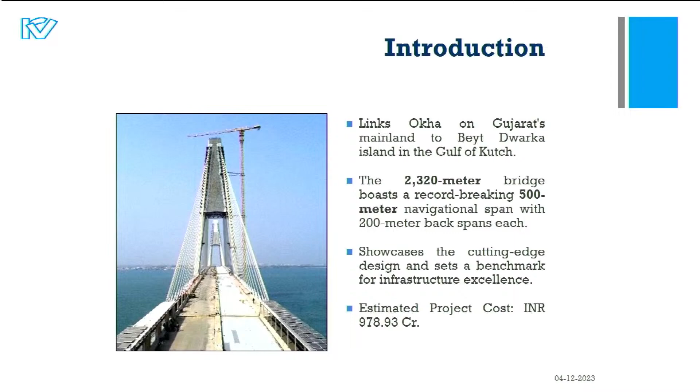So we are constructing around a 5-kilometer bridge linking Okha on the Gujarat mainland to Beyt Dwarka. The bridge proper length is around 2320 meters, and we have the highest record-breaking navigational span of 500 meters in this bridge. The cost of this bridge is around 978 crore.

As you can see, this bridge connects the mainland to Beyt Dwarka Island, and this Bet Dwarka is the home of Lord Krishna. So Bet Dwarka is the Indian version of Atlantis - there used to be a city of gold in Bet Dwarka, which was immersed in the sea at the end of Dwapar Yuga. So the main bridge length is around 2.32 kilometers.

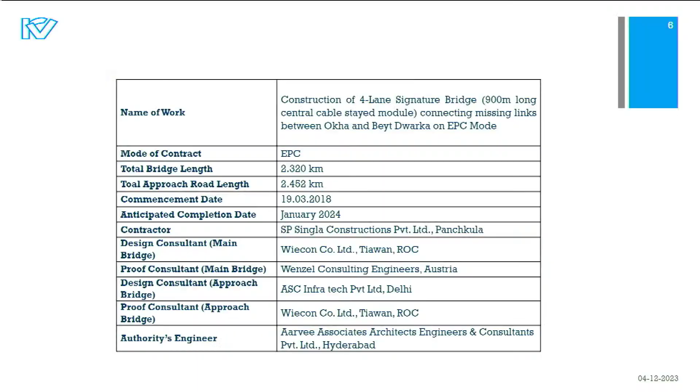This bridge also has an approach road of around 2.5 kilometers, distributed on the two sides. The commencement date of this project is March 2018. Bridge length is 2.32 kilometers, approach road length is 2.452 kilometers, and the bridge is going to be completed very shortly.

The contractor is Messrs. SP Singla Constructions. Design consultant is Wiecon Taiwan, proof consultant is Wenzel, design consultant is ASC Infra, and proof consultant is Wiecon. Authority engineer is Aarvee Associates.

The main bridge length, which is the cable-stayed portion, is 900 meters. Span configuration is 200 plus 500 plus 200. The deck width is around 29.6 meters. It's a 4-lane bridge, the carriageway width is 9.5 meters, and it is on pile foundation.

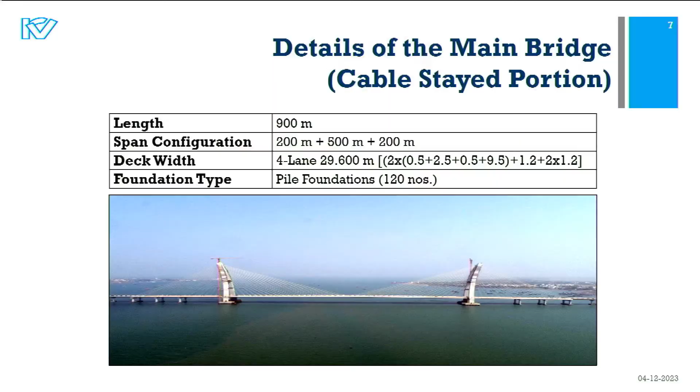In addition to the main bridge, there are approach bridges on both sides - 17 spans on the Okha side, 15 spans on the Beyt side. Deck width is 27.2 meters, and pile foundation is there. The approach road length is around 2.5 kilometers, 1.241 on one side and 1.2 on the other side, with two junctions, one on the Okha side and another on the Bet side.

We are providing 3 parkings: one on Okha side, one on Bet side, and one near the temple, which is called the VVIP parking. There is a pedestrian walkway throughout the bridge, around 2.5 kilometer pedestrian walkway is there. There is decorative lighting, and because the theme of this project is Lord Krishna, there is peacock feather engraving on the pylons.

This is one of a kind bridge in the world. It has an iconic A-shaped pylon, which is in curve shape, and this pylon is hollow from the inside. There is an outward inclination of around 21 meters from the center.

We have used epoxy coated steel in the bridge and M70 grade concrete. There are 38 cables on each pylon on both sides, so a total of 152 cables. The cables which are more than 80 meters are provided with dampeners. Each strand has been galvanized, enclosed in extruded polythene protective sheath, and bundles of strands are further encased in HDPE tube.

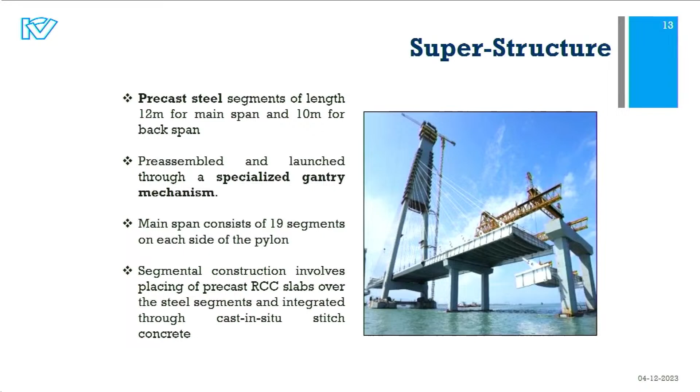The superstructure consists of precast steel segments, which are 12 meter size in the main span and 10 meter on the back span. They are pre-assembled and launched through a gantry mechanism. The main span has 19 segments on each side. It involves composite construction - RCC precast slabs are placed over steel segments, and then stitching is done.

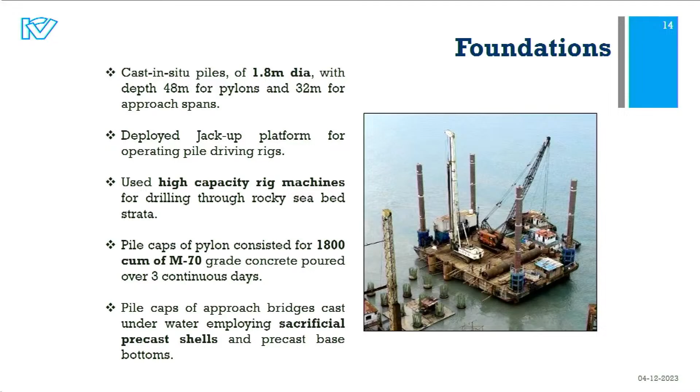The size of foundation for this bridge includes 1.8 diameter piles. For pylon, the depth of piles is 48 meters. For approach span, it is 32 meters. We have deployed jack-up platforms for pile driving, and used high-capacity rig machines as the strata is rocky seabed.

Pile caps - there are gigantic pile caps which involved 1800 cubic meter of concrete, and the concreting had to be done continuously for 3 days. Pile caps of the approach bridge are cast underwater. This is also a prominent feature of this bridge, and sacrificial precast shells were used for this.

The superstructure of the approach bridge consists of spine and wing arrangement. The spines have been launched using a spine launcher of 800 metric ton, which was positioned over the pier caps. Wings have been connected to spine using pre-stressing, and the substructure consists of circular piers of 2.6 meter diameter.

This project is going to have pedestrian walkways with solar roof, around 2.5 meter wide, and all along the pathway there are intricate carvings on the life of Lord Krishna and shlokas from Bhagavad Gita. The roof has solar panels which will generate around 1 MW of solar energy. The solar panels also have a sprinkler system, keeping in view the environment of that area.

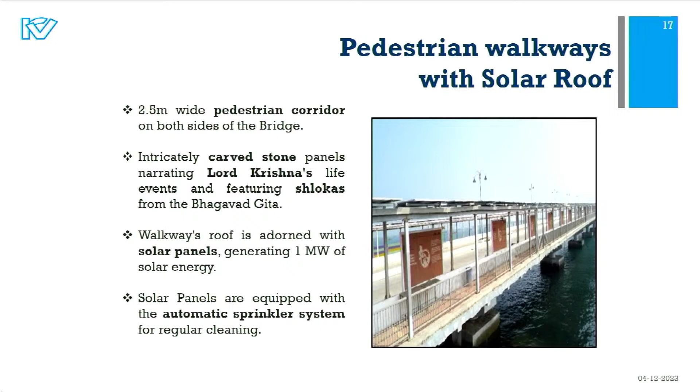There are 12 viewing galleries in this project, and peacock feather engravings and paintings are on the pylons. One special feature is the decorative lighting, which will be based on the theme of color of peacock feathers.

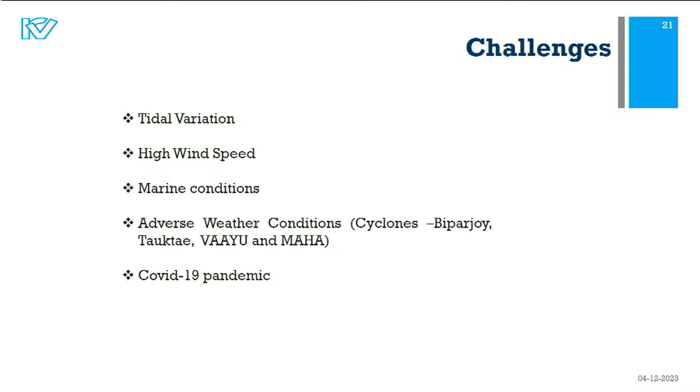This was a very challenging project because it is affected by tidal variation. The wind speed is very high in this region. The marine conditions cause a lot of problems, and there are a number of adverse weather conditions because this is on the sea coast. A lot of cyclones have affected this project - the most recent one was Biparjoy in 2023, in 2021 it was Tauktae, and in 2019 there were 2 cyclones, Vayu and Maha.

COVID-19 pandemic also affected this project.

This project is going to be launched very shortly, inaugurated very shortly. The progress is nearing 97%, and this will ensure seamless connectivity between Okha and Beyt Dwarka.

Earlier the people had to depend on ferries which ply between the mainland and Beyt Dwarka, but the ferry service is affected by weather. Once this bridge is commissioned, the life of the local residents will be transformed entirely.

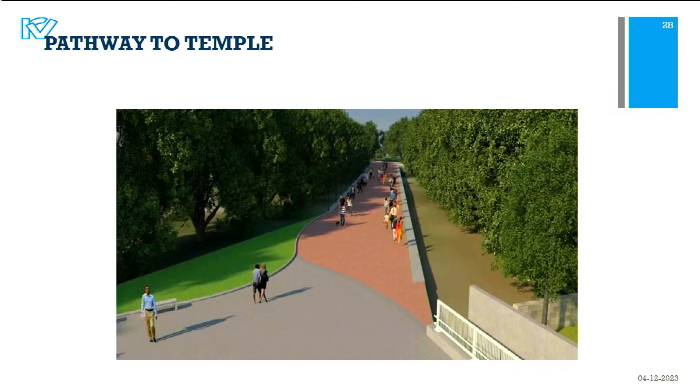This is how the bridge will look like. This is the view of the viewing gallery at the pylon location - on each pylon there are 2 viewing galleries. This is the pathway to the temple. This is how the peacock engraving will look like.

We also have a short video - this is a video of the actual bridge.

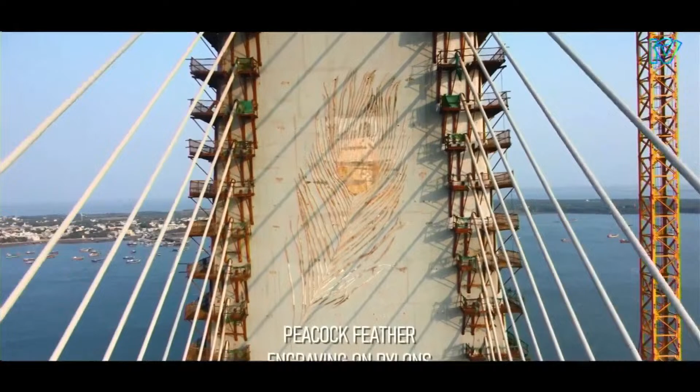To put things into perspective, around 1,50,000 cubic meters of concrete was used in this project, around 50,000 metric tons of rebars, around 10,000 metric tons of structural steel, and around 1,500 metric tons of stay cables.

So I welcome you all to visit this bridge once it is open to traffic in January. Thank you.

Thank you, Sandeep, for giving glimpses of the bridge under construction. Though the original schedule has been delayed because of challenges like tidal waves, construction inside the sea, and even COVID, there were a lot of issues. But finally it's going to be completed very soon. 97% progress is already there.

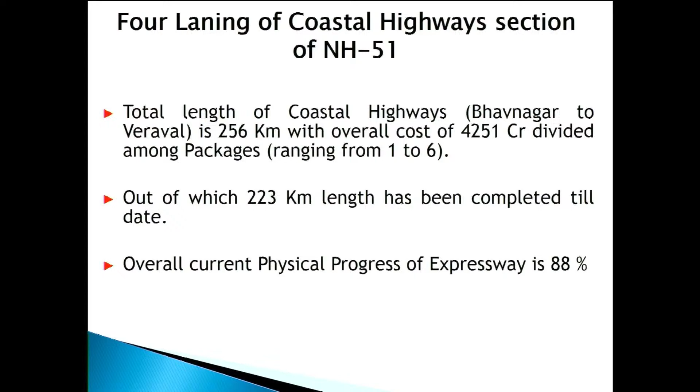Another section is Sanchor-Santhalpur Express Highway, which has 4 projects, 125 kilometers, and is about 94% complete. Another coastal highway has 6 packages, 256 kilometers, with financial implication of 4,000 crore, out of which we have completed 223 kilometers. Overall progress is about 88%. Soon it will be completed.

Other projects under implementation by NHAI are listed in the table. Now I go ahead. Status of upcoming projects - new projects we are going to take up, about 800 kilometers, having financial composition of 24,000 crore.

Now I will share with you some success stories of regional office Gujarat. We have built 2 world records, created in the state of Gujarat by MORTH, NHAI - construction of a 2.5 kilometer long, 4-lane cement concrete road in 24 hours.

Another is highest quantity of bituminous mix laid by road construction in 100 hours. This is in Panchmahal district. Some salient features are as below. These are the project details.

Concreting of highest PQC, highest quantity of pavement quality concrete laid in 25 hours. We had targeted 12,000 cubic meters and achieved 14,000 cubic meters. Largest quantum of pavement quality concrete production in 24 hours - this is also about 12,000 cubic meters targeted, and we achieved 14,000.

Laying 1,200 meters we had decided, but we have achieved 1,285 meters. Total area covered at 48,000 square meters.

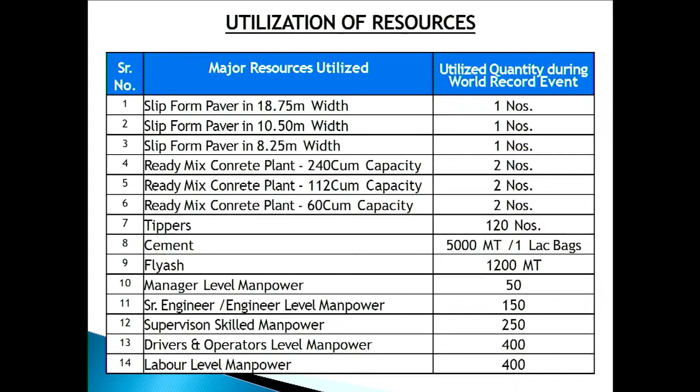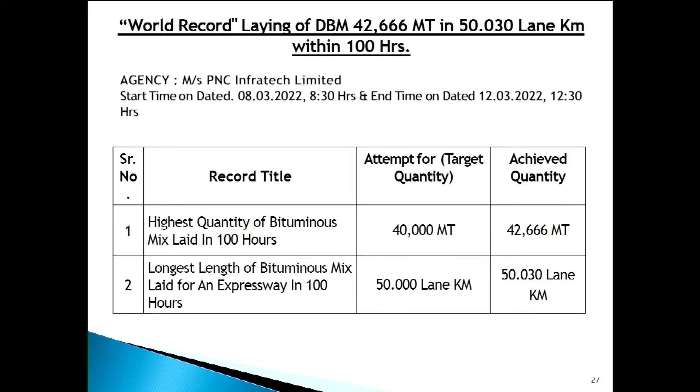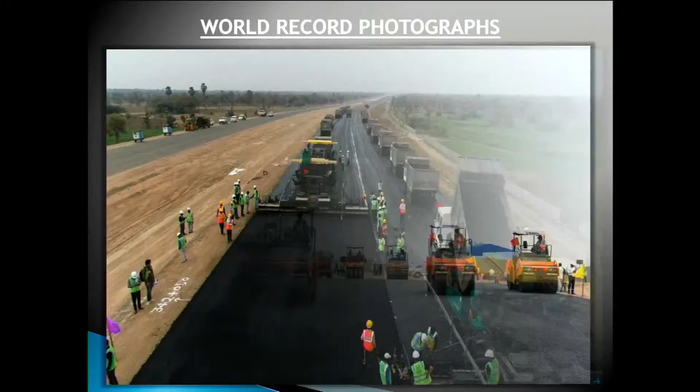These are the certifications given by the agencies: India Book of Records for the longest length of flexible pavement, DBM course road construction in 100 hours, and the highest quantity of bituminous mix laid for road construction in 100 hours.

In this Delhi-Mumbai Express Highway project, we have also utilized some new technologies. I will share some of them with you. These are precast boxes in 2 by 2 meter and 3 by 3 meter sizes.

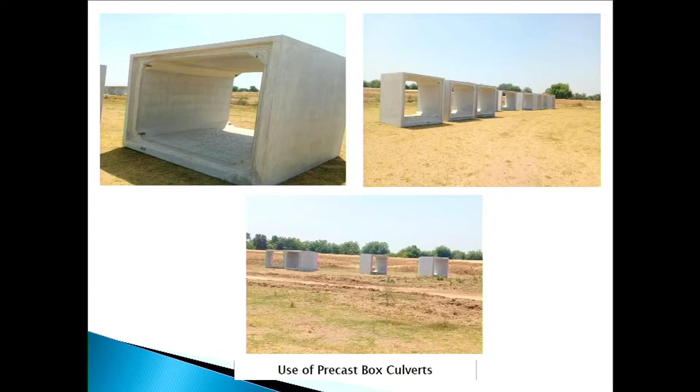There are 3 types of wayside amenities. Type 1 is for passenger facilities. Type 2 is for truckers and goods vehicles. Type 3 serves both passengers and truckers.

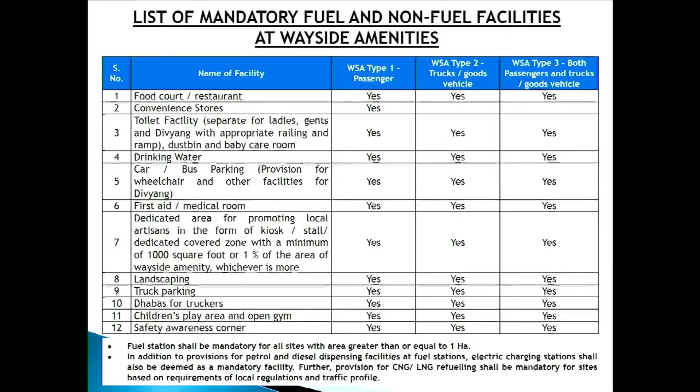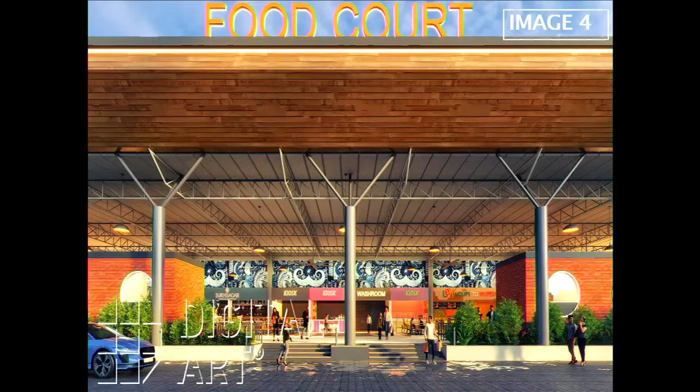Some photographs are there, and this is an animation. After complete construction, it will look like this.

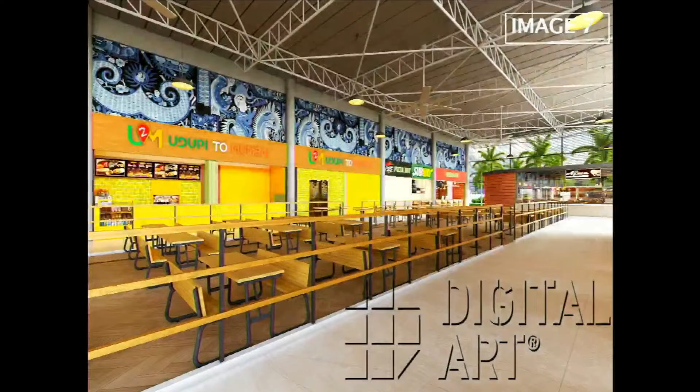There are dhabas, motels, food courts, and trauma centers also there. A fuel station is also there, along with dormitories for drivers.

Now I will show some slides and some videos.

पहला कौन सा दिखा रहा है? ये साइड का?

This is a small presentation, a small video showing the progress of the highways in Gujarat state.

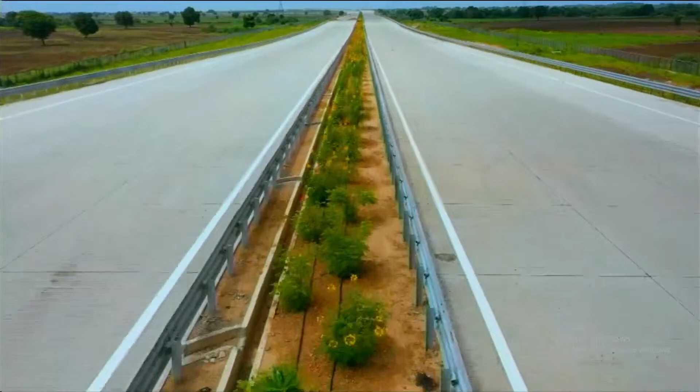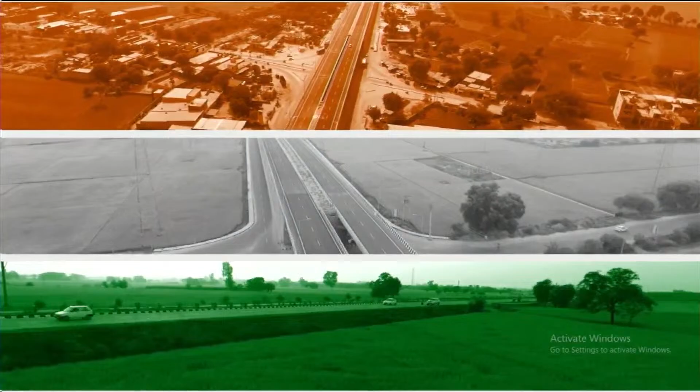जय हिंद। दिखा एक बार।

लास्ट वाला ना सर? वो करो। टाइम ज़रा कम है, पर एक मैं वेसाइड एमेनिटी का एक एनिमेशन भी दिखा देता हूँ आपको। शुरू हो गया।

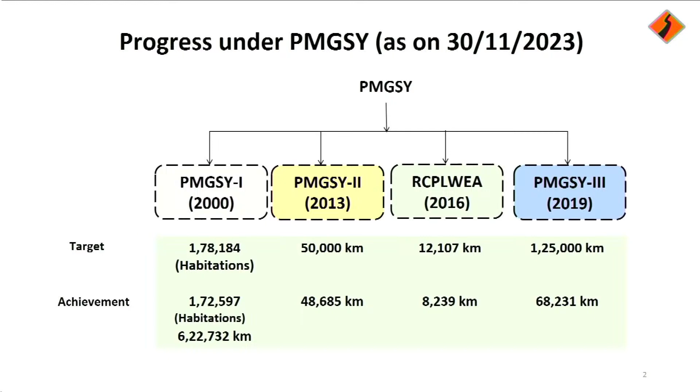Under this scheme also, almost 68,000 kilometers has already been completed. This is what we have achieved during the last couple of years. A quick presentation of what lengths we have completed during the last couple of years.

From this data, you will find that at one point of time, we were constructing roads with an average speed of almost 135 kilometers a day. Now, because we are almost at the fag end of the scheme, the completion rate has reduced, but still we are working at a speed of almost 45 kilometers per day. Along with this, we are also implementing new technologies, with which we are constructing roads at equal speed, almost half of the total completion. That is, if we are constructing 45 kilometers a day, almost 25 kilometers are being constructed with various new technologies. These are the financial releases and expenditure over the years.

Various new technologies are being adopted. In fact, we issued guidelines in 2013, and since then we have started implementation of various new technologies in different states based on need and availability of materials. These are the new technologies being practiced as of now, and till now, 1,43,761 kilometers of roads with various new technologies have been sanctioned, and 94,000 kilometers has already been completed.

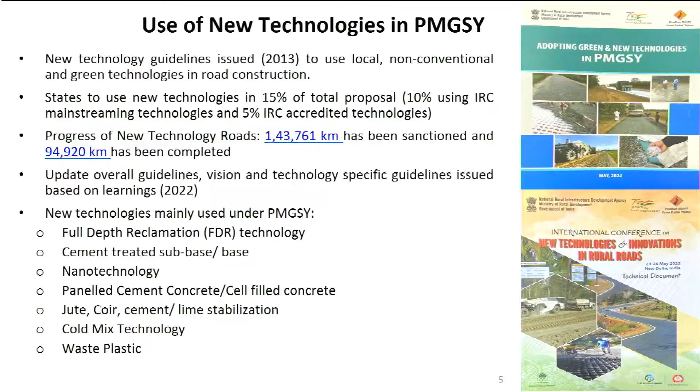To avoid that, we started publishing a lot of documents on our own for the time being, so that implementation starts immediately. These are in the form of do-it-yourself booklets. A few of them are being presented over here. This is the overall increasing sanctions under new technology, which have already been given to the states. These are the do-it-yourself booklets, which have already been published by NRIDA, so that some of them may cover subjects for which IRC guidelines have already been published.

But looking into implementation-related issues, because these roads are being constructed by Jila Parishads and rural engineering departments in different states, for ease of understanding, these booklets have been brought out like that on white topping. We already have an IRC guideline, SP-76, but further simplifying the language and technology, this guideline has been brought out so that people can go through it and start execution or adoption.

Then we have a very strong IT backbone for monitoring of the scheme and even for implementation of these new technologies. This is the website through which the entire PMGSY is being monitored. This is our data website being managed by Center for Development of Advanced Computing, that is CDAC Pune, omms.nic.in. This has live data. Each and every module will have live data updated from the ground level by engineers at the district level.

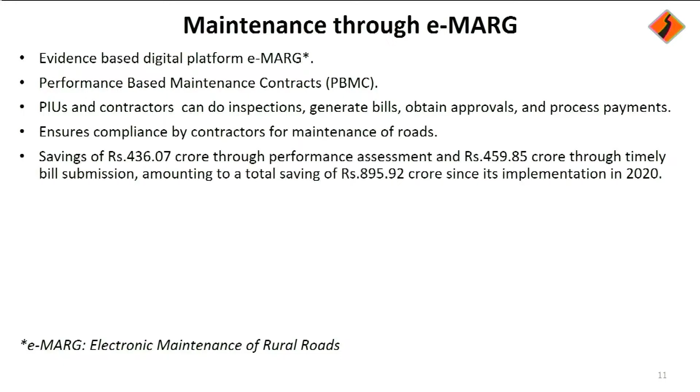This e-MARG system has a marking system. The PIU carries out inspections and awards marks, and if maintenance is proper, with more than 80% marks given to any road, only then can payments be made. So there are a lot of restrictions which have been put in.

We have a 3-tier quality monitoring system: first tier at PIU level, second tier at state level, and third tier at national level. A large number of inspections are carried out, and the second and third tiers keep uploading their inspection reports and corrective actions wherever required onto the OMMAS.

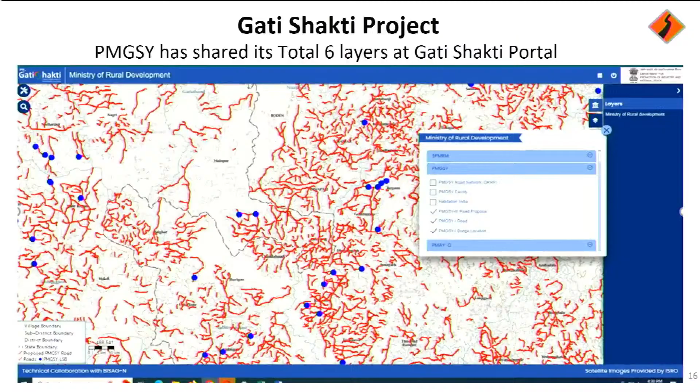This is an old slide. Now 20 layers have been made available onto GIS, and they are being pushed onto the Gati Shakti project. This is PMGSY, National GIS, and GeoSadak.

Rather than talking about various new technologies we have adopted and completed over a huge length, I will present the much expected and much talked about technology: full depth reclamation, in which we are doing stabilization using cement as well as commercial chemical stabilizers.

Most of you must be aware that we do not have guidelines for implementation of this technology from IRC. So last year, an international conference was organized under PMGSY, and guidelines prepared through various experts were released to start the projects. In May '22, these guidelines for full depth reclamation for rehabilitation of low volume roads were released. Another reference being used is SP89 for commercial chemical stabilizers.

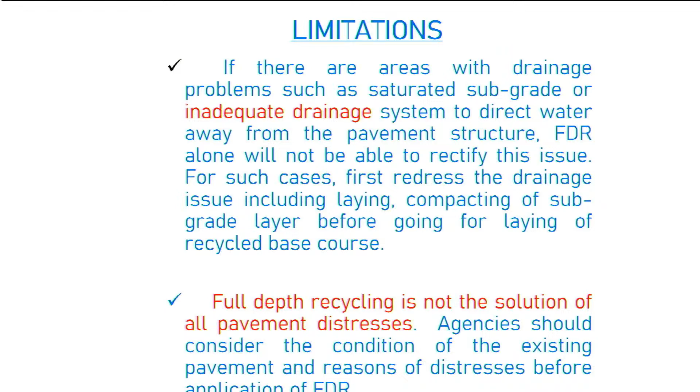There are a couple of limitations of this technology, and my request to those listening is to have a detailed study of the available booklet, because even international literature on full depth technology is very limited. We collected all the international literature, summed it up with the help of various experts, and brought it into a booklet available under the publication section of NRIDA at pmgsy.nic.in. All our publications are available free of cost on the website in the citizen domain, so anyone can go to that section, download it, and use it for reading.

Without understanding and without knowing the limitations, one should not embark upon the use of this technology, because that may have a lot of complications. Wherever there is a limit, there is an issue of drainage. Please have thorough investigations before taking a decision of implementing FDR technology.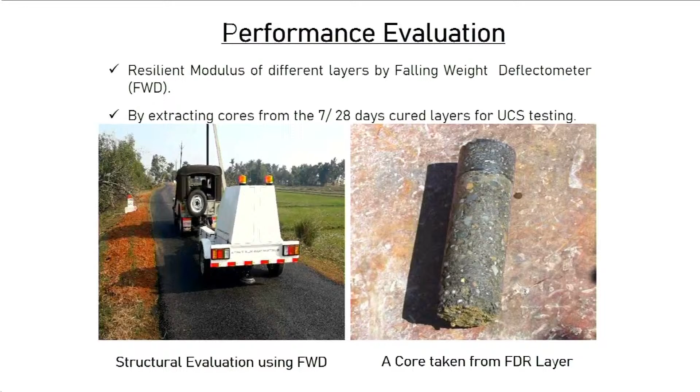This is how the cores are to be taken and they are to be tested. As of now, SP89 suggests two ways of testing this structural layer of stabilized base. One is through testing of UCS by taking these cores, and the other one is falling weight deflectometer. We are all aware that falling weight deflectometers have limitations of availability in the country as of now, and the cost for carrying out this test is also relatively much higher. So we prefer to go through the coring system, getting them tested at regular intervals.

For example, the height of embankment. For rural roads, we have a specified minimum height of embankment as 600 mm. The IRC says 600 mm should be the bare minimum height of embankment plus subgrade. So there should not be any compromise.

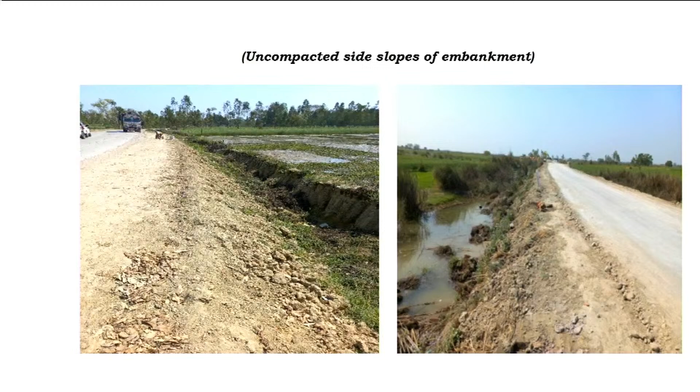I'm just flashing these photographs so that you should be aware that this is not a good way of doing the things. The shoulders and the slopes should also be compacted along with the stabilized layer, rather than focusing only on the stabilized layer and then trying to compact the side slopes.

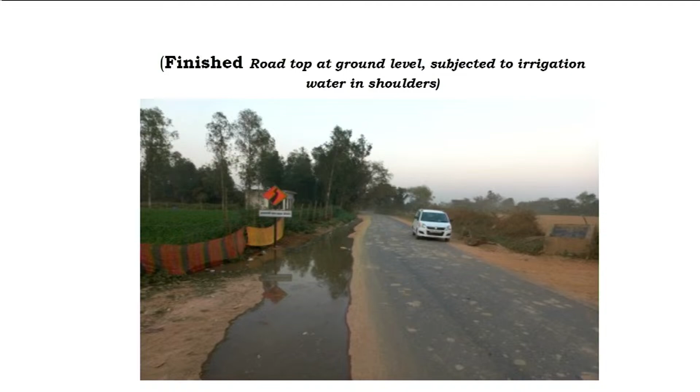This is another photograph of a poorly executed work in one of the areas. This is brought to your attention just to make you aware that this should not happen. This is again the same photograph, indicating that the adjoining land and the top of the road are almost at the same level. That kind of mistake should not be there.

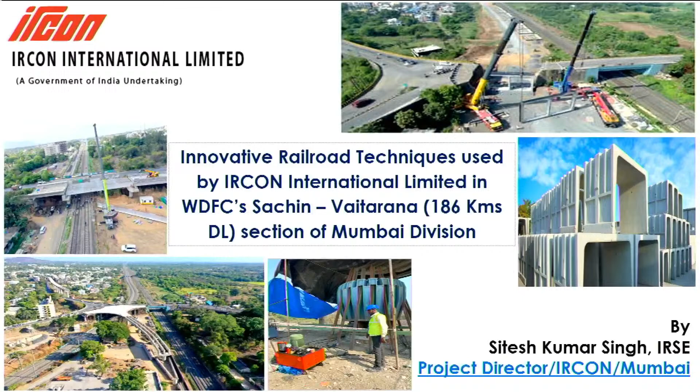It is in the Sachin-Vaitarna section of the Mumbai division of Western Railway. I have divided my presentation into 3 parts: a very brief introduction about the project, then the techniques - some civil engineering techniques and 2 techniques from the track side, since being highway engineers here I want to go light on the track part.

And finally the takeaway. This project runs parallel to the Mumbai-Delhi Rajdhani route, starting from Vaitarna, a suburb of Mumbai near Virar, up to Sachin, which is 15 kilometers short of Surat. It is a total of 186 route kilometers, out of which it is a double line - 372 kilometer main line, 5 crossing stations, plus some depots, sidings, and connections with the Indian Railway system.

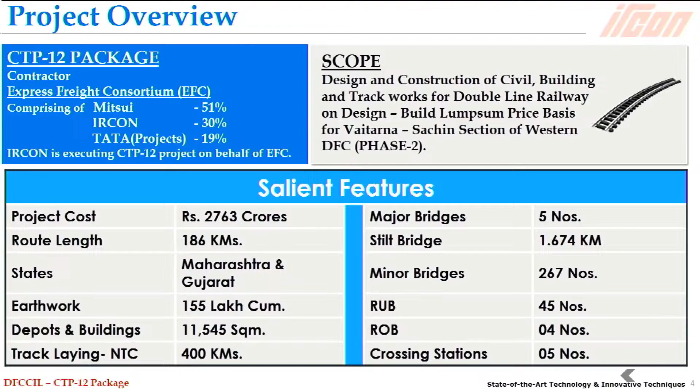60% of the project falls in the state of Gujarat and the remaining 40% in Maharashtra. This is a design-build contract awarded to a consortium comprising Mitsui, a Japanese company, as the lead partner, IRCON International Limited, and Tata Projects Limited. There were 3 packages allotted.

Only one package, CTP-12, the civil and track package, is being executed by IRCON International exclusively. The original cost was over 2,700 crores, and it has now gone up to 3,400 crores due to some variations. The quantum of work indicated here includes 155 lakh cubic meters of earthwork, etc.

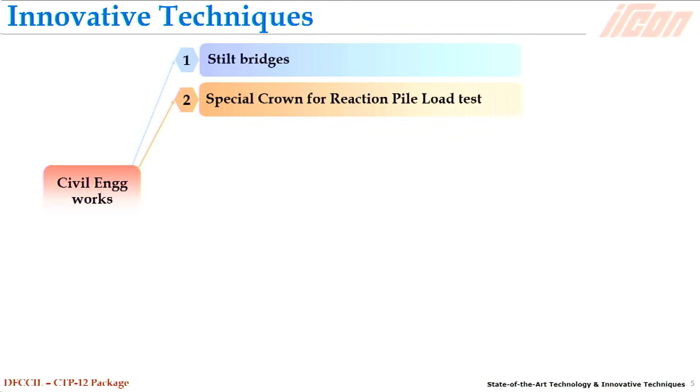Now coming back to the innovative techniques we used for the civil engineering part: introduction of stilt bridges; use of a special crown for reaction pile load test; introduction of RCC twin box segments as an opening through one of the ROB approaches; gap filling with soil wrapping using geogrid and geotextile; construction of the largest RCC rotary slab for a 4-leg junction of an ROB; and provision of prefabricated vertical drains for ground improvement work.

And then we introduced RCC U-girder as superstructure for ROBs. The last item in this presentation will be provision of precast segments for drain ducts and box culverts. I will discuss each briefly, one by one.

Out of the entire 186 route kilometers, a 5-kilometer stretch is very near the coastal region of Palghar district of Maharashtra, near the Arabian Sea. The challenge was that the normal formation initially planned was with normal earthwork, but there were 3 challenges there.

First, in the 24-hour cycle, the tide comes in and goes out twice, and water remains stagnant there for 4 to 5 hours - it's a low-lying area, so normal formation was not possible with this system. Secondly, there are thick mangroves, and the forest department did not agree to allow large-scale cutting of mangroves. Third, the top two layers of existing soil are totally black cotton soil - slushy, muddy, marshy - so it was not possible to go for any type of formation, even with ground improvement, in some patches.

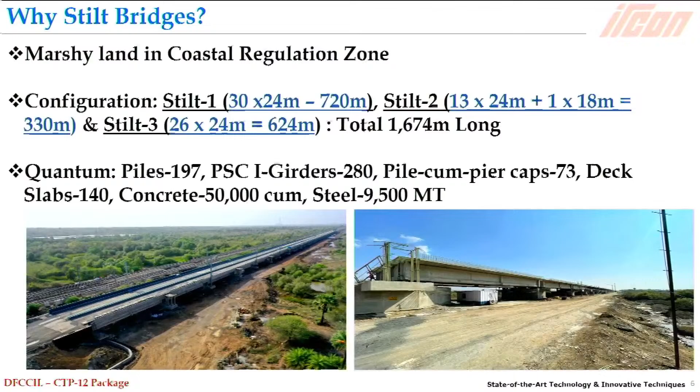So in 3 patches where the tide was predominant, we went for the stilt bridges. We had the same superstructure size for all, same span throughout - 70 up, 70 down. So 140 total deck slabs, each deck slab supported over 2 I-girders.

Total 280 I-girders in all. All the piles used in these stilt bridges were mostly of 2-meter diameter. So we needed a test load of 4,500 metric ton for the initial pile load test.

We checked that no crown of this much capacity was available in India, so we searched overseas also. Then we found that the Taiwanese had used a 4,000 capacity crown. So we requested them to provide the design, and they agreed to provide some 30% extra reserve strength with us. So a 6,000 metric ton crown design was given by the Taiwanese. We checked it from our own office, by STUP, and finally the corporate office consultant. We successfully conducted this test - this was done for the first time in Asia.

Now another interesting thing we did was regarding the introduction of twin box RCC segments. For mechanized track laying, there has to be continuity of the formation. On the parallel railway side, there was one ROB - Valsad ROB - where we had infringements of the pier approach. The new ROB, though sanctioned, was a long lead item, and the track laying machine was already coming from the Surat side to Mumbai.

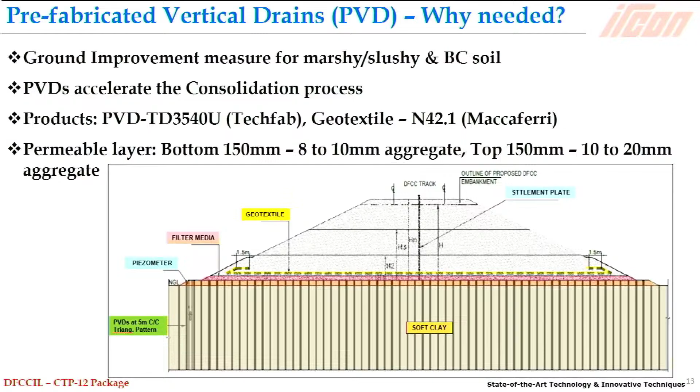Over this we place one layer of geotextile, and over the geotextile you have the entire earthwork formation. This earthwork formation itself gives the preloading, and through these vertical drains it acts by capillary action, so water rises up due to that loading and ultimately goes out from the sides. It is a long consolidation process, and for instrumentation we provide settlement plates at every 250 meters and piezometers for pore water pressure at every 500 meters.

At one of the dedicated field sections, our DFC formation had two encumbrances of existing ROBs, the Saphale and Palghar ROBs. Their piers and abutments were coming in the alignment of the proposed DFC track. So the old ROB was to be dismantled and replaced with a new ROB. Replacement was not a problem, but the issue was the headway.

For running the double-stack container versus single container freight, the headway difference is 2 meters. So for double container you need 2 meters more headway. We had to raise the overall road level of the new ROB by 2 meters.

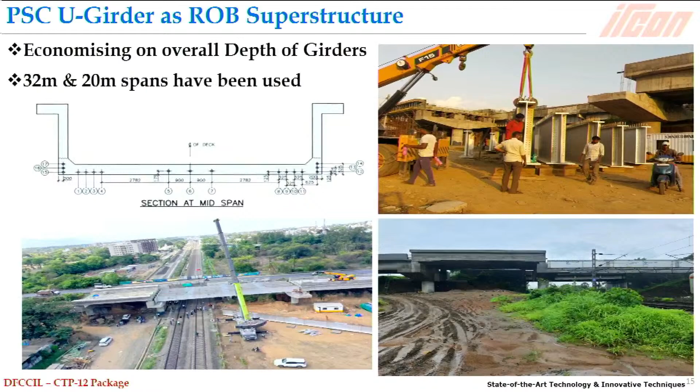Another item is precast RCC drains, utility duct segments, etc., which are now used everywhere - we have used them widely. But the last part, the box culvert, I would like to highlight. It has already been shown on the highway side.

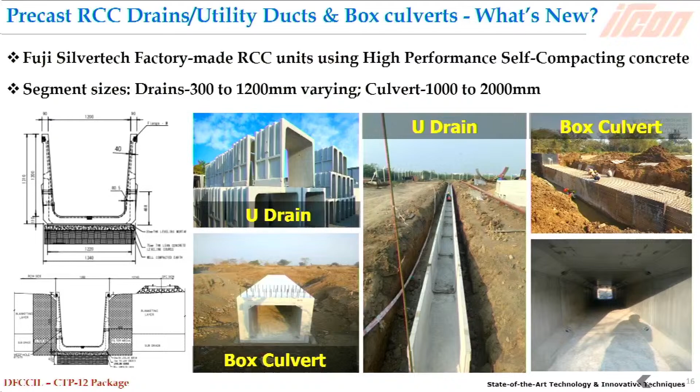There were 3 canal crossings where we had to dismantle the old structure and replace it for our DFC track. The Canal Authority did not allow a canal block for more than 2 weeks, 15 days. So we went for precast segments from Fuji Silvertech. Before using them, we tested the water tightness at their factory, and once satisfied, we used them - it is running perfectly well now. We completed the entire job within 15 days by taking the block.

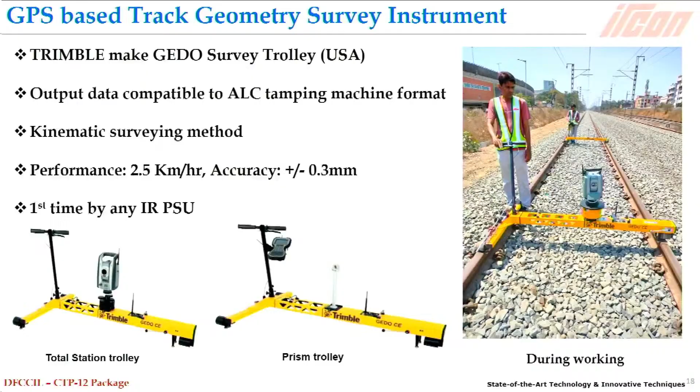Now only 2 portions of the track part remain: one is the GPS-based track geometry survey instrument, and secondly, under-sleeper pad and under-ballast mat. The GPS-based track geometry survey instrument is normally used for railway track, though it can be used anywhere. The best part is this is a Trimble make from the USA.

The best part is that the track parameters are recorded using a prism trolley in front and, at the rear, a total station. In front you can see the total station, at the back you can see the prism trolley. So with the total station and prism trolley, the entire thing is recorded without any manual intervention.

It is robotically controlled and laser guided, with no manual intervention - we only have to move the things. It kinematically records at 2.5 kilometers per hour. Whatever data it records in 3D, the GPS coordinates, it compares the track parameters with the design GPS coordinates. Whatever is the difference in slew or rail top level can be directly fed into our tamping machines - you take out the pen drive and just feed it, because the format is the same. So there is hardly any idling for the tamping machine or its operator. It's a very good thing.

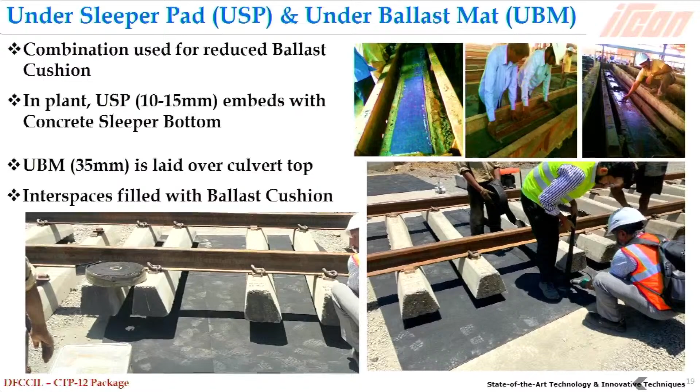For the last thing in today's presentation - under sleeper pad, at one location near Boisar, below Boisar ROB in Maharashtra, we had a problem. One pipeline, 1 meter diameter, MIDC Maharashtra Industrial Development Corporation pipeline, was going underneath. After having the minimum overhead clearance and the track, the stipulated 350 millimeter ballast cushion we were not able to provide. Either we had to reduce the overhead clearance below minimum or reduce the ballast cushion. In both cases, a permanent speed restriction would have been imposed. So we searched for some other solution.

Then we came to another one, Getzner India, an Austrian firm - they have a branch in Pune, Getzner India Private Limited. We approached them; they have got vibration solutions. This was done for the first time in India. They gave the solution and designed the entire thing: at the sleeper bottom they had an under sleeper pad, with a polymer mesh that impregnates with the concrete at the bottom, and at the bottom we provided the sleeper mat and under ballast mat. The ballast cushion was reduced to 250 millimeter instead of 350 millimeter. The cost for lowering the pipeline would have been 8 crores, and no timeline was given, maybe 1 year, but we did it in 1 month and 3.5 lakhs only.

Thank you. So with this being a design build contract, we had so much flexibility to use new techniques etc., and it saved a lot - cost effective, everything it saved. With this, I conclude my presentation. Thank you so much.